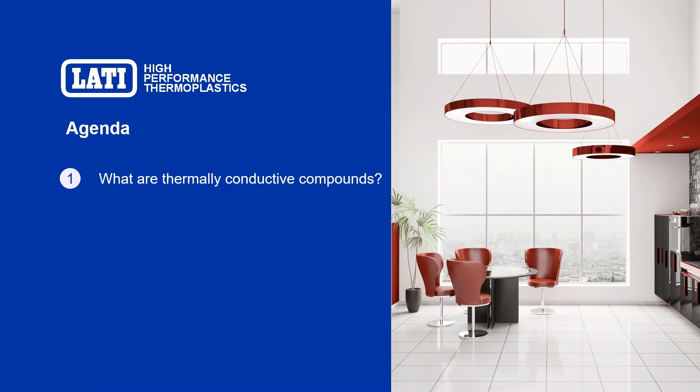We will discuss about 5 main topics. The first topic will be a short resume of what are thermally conductive compounds, how they are composed, and how they do work. The second topic will be about the properties of thermally conductive compound and how they can actually provide staggering improvements to your projects as long as they are properly used in your applications. So we will talk a little bit about proper design with thermally conductive compounds.

But the topic of the day will be about the environmental sustainability of plastic-based thermally conductive materials. We will try to better understand what is environmental sustainability and how plastic can actually compete with traditional solutions as metals in developing more sustainable applications. We will talk about the so-called GWP, which is the global warming potential, which is a well-known term describing the way products and processes impact on greenhouse gases generation.

And we will try to better understand how thermally conductive compounds from LATI, the so-called LATICONTHER compounds, can actually provide very interesting figures when it comes to the GWP. At the end of the webinar, we will try to wrap up and draw some conclusions about how these plastics can actually provide a very interesting proposal for not only perfectly working, but even perfectly sustainable applications.

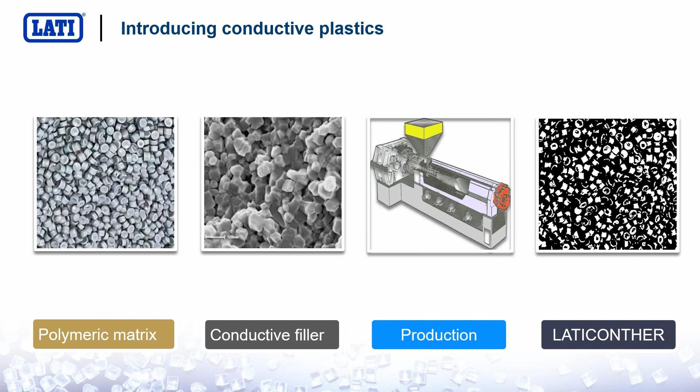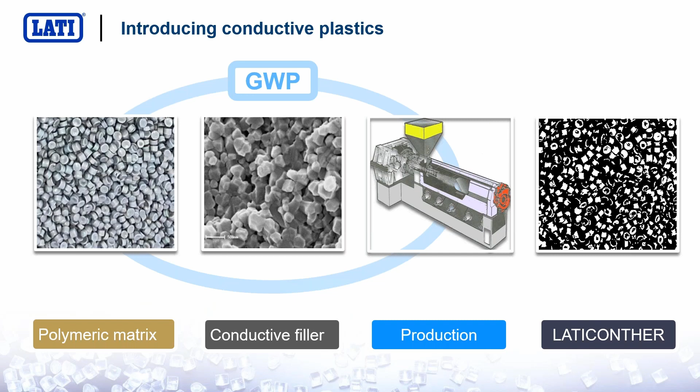Now, the first 3 steps, so the generation of the polymeric matrix, the production of the conductive filler, and the extrusion of the pellet in itself, contribute to the production of greenhouse equivalent gases. So we will try to understand how these 3 phases actually contribute and how they do actually weigh when it comes to GWP.

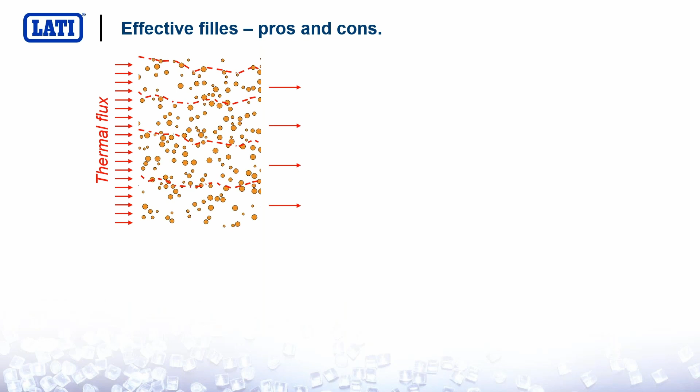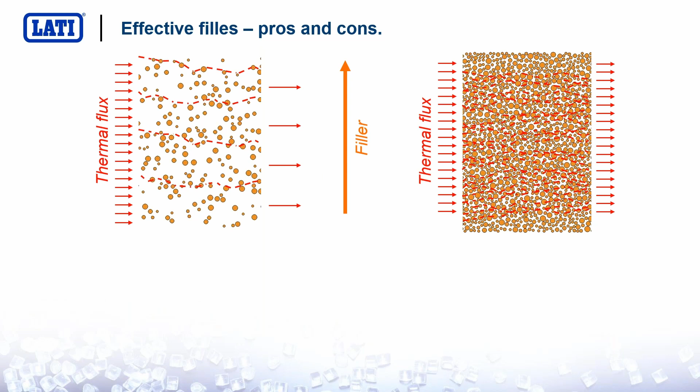The more you increase the filler content, the more capable your material will be to properly transmit and manage the heat flux. So, as you have already understood, thermally conductive compounds feature staggering high filler content. Today we produce up to 80% of graphite and ceramic to have reliable thermal performance. And of course, you have to be able to select a proper polymeric matrix, because not all polymers can actually be used to produce effective and properly working thermally conductive plastics. Only some of them, like polypropylene, some polyamides, polyamide 12, PPS, and so on. But not every polymer can be used.

Well, let's suppose we have been able to produce this highly filled compound. Which are the disadvantages of this kind of product? Well, these products are rather viscous, so they cannot be used for all-around applications.

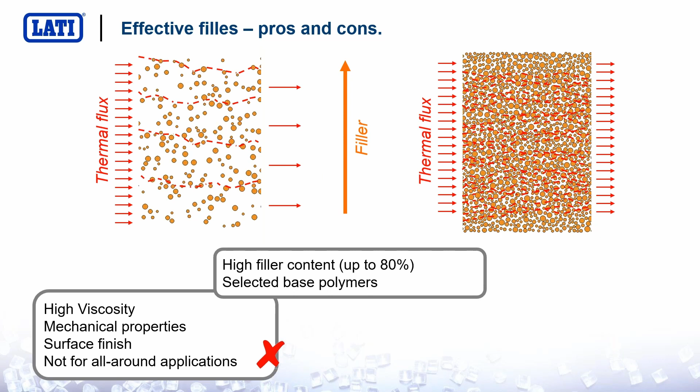The surface finish is not perfect, and the mechanical properties of these compounds are not as good as proper structural plastics because of the high amount of inert filler we've been able to put inside.

But which are the advantages of these materials? First, you have a very high thermal conductivity, 100 times higher than ordinary plastics. Then you have very good dimensional stability—your injection molded part will stay flat and respect the tolerances on your drawing because of the higher filler amount. The performance of these materials will last in time: the thermal conductivity we've given to the plastic will not fade away, it will be constant in time. So you can actually design for parts working even in 20 years.

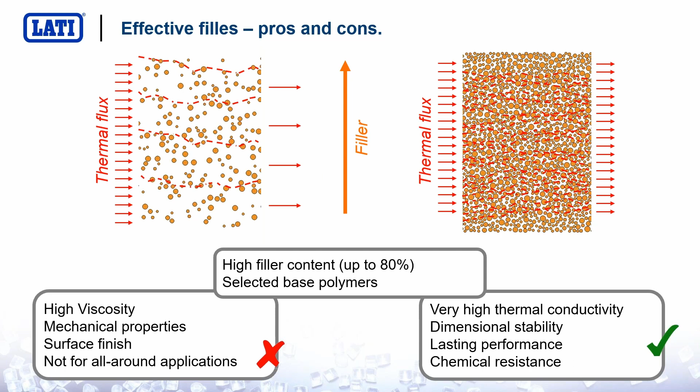Last but not least, don't forget the chemical resistance of plastic, which is actually much higher than that of metals, especially for outdoor applications or under the roof where you can have temperature and dirt build up. Chemical resistance is always a very interesting advantage of plastic.

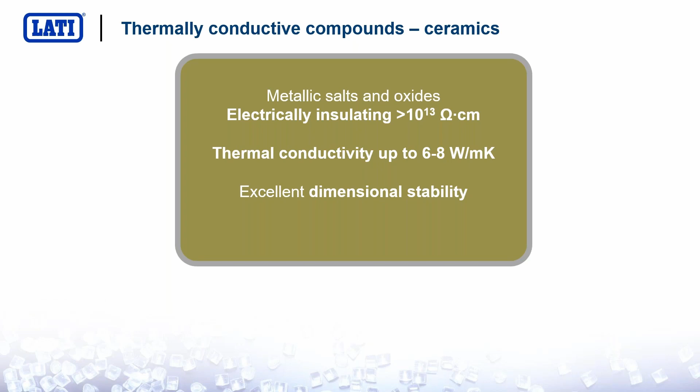Now, we've understood that we have to put a lot of filler into plastic to have a thermally conductive compound, but which kind of filler? You can select from ceramics, which are normally metallic salts or oxides. These ceramics are effective from a thermal conductivity point of view, they provide excellent dimensional stability, and they are electrically insulating, which is also very important for some E&E applications. You can also rely on some other interesting properties.

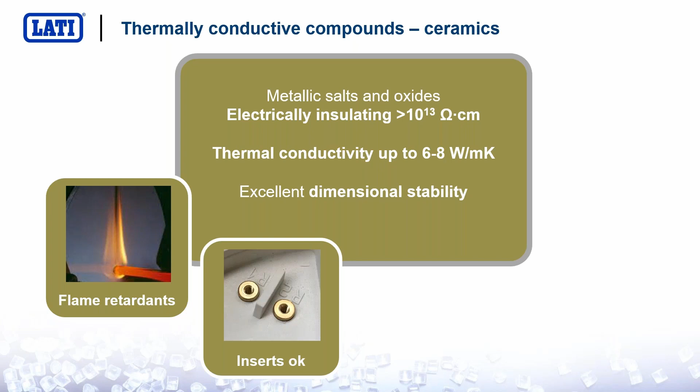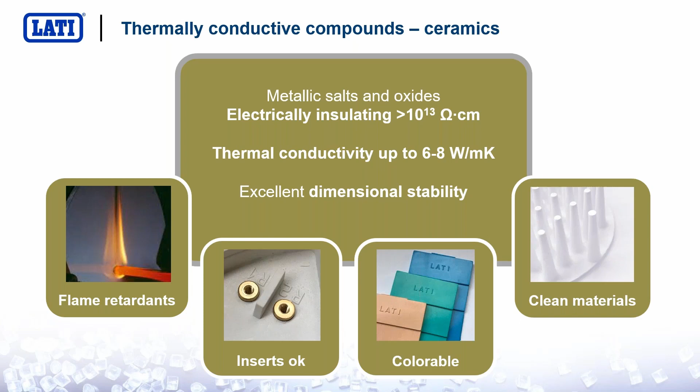Some of these thermally conductive ceramic-based compounds can be flame retardant. They can accept inserts, they can be somehow colored—even if you cannot have full chroma, you can have some faint, light colors. And they are clean materials; they will not stain your machine or your application.

The other chance we have is graphite. Graphite is an extremely versatile product. Actually, graphite can be electrically conductive, very electrically conductive—the resistivity of the material can be as low as 10 power 4. The thermal conductivity anyhow is really very, very high. This is the highest thermal conductivity that we are able to achieve, close to 30 watt per meter Kelvin.

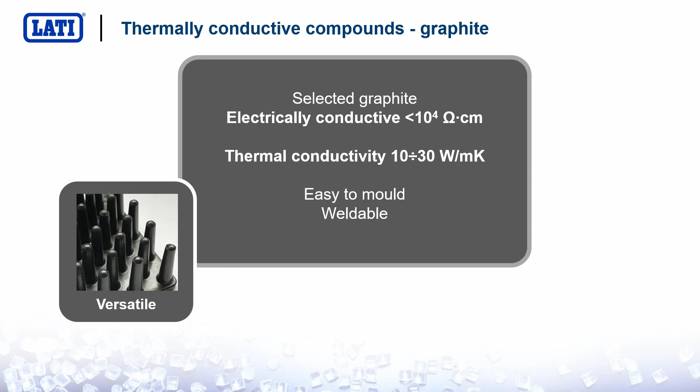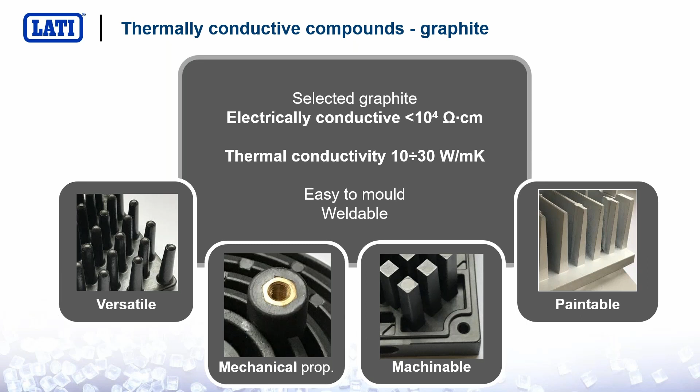They can accept inserts and can be machined, so from a mechanical point of view they're very interesting compounds. You can somehow drill holes, you can use screws directly into these graphite-based thermally conductive plastics, unlike ceramic-based ones, which are more brittle. And you can also paint them because they're electrically conductive—you can use modern powder painting techniques.

The biggest issue when it comes to thermally conductive plastics is to properly disperse the filler. You have to achieve an excellent dispersion of the filler inside, otherwise the compound will not work.

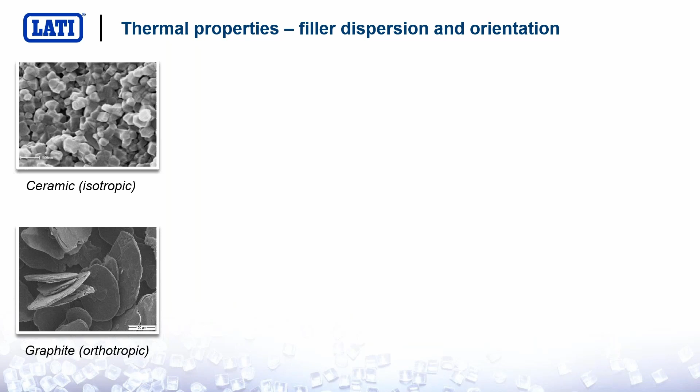The fillers are very different, not only chemically or morphologically, but also in shape. Ceramics are more or less always isotropic—they are like small spheres, as you can see above. Graphite and hexagonal boron nitride are flake-oriented particles, so they can actually orient during filling. Why am I saying that? Because the thermal behavior of these plastics, when using a flake-shaped filler, can change quite a lot depending on filler orientation and wall thickness.

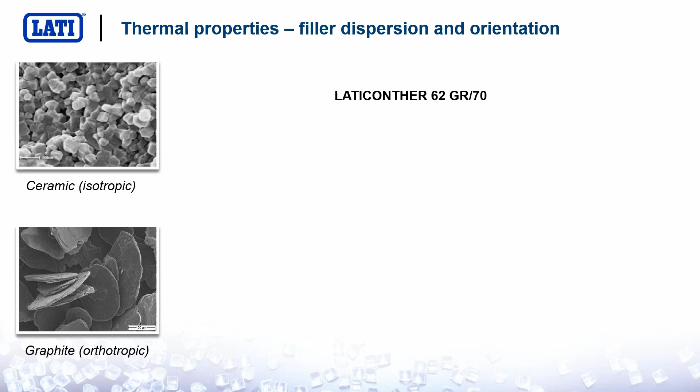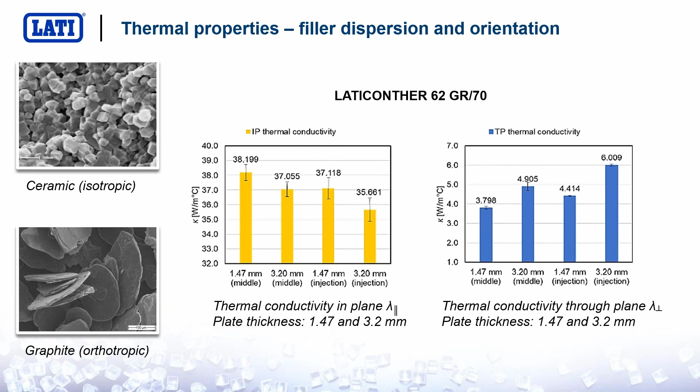Through-plane is completely different. The through-plane conductivity, which is normally what's used in many applications, is much lower—in the range of 3 to 5 watt per meter Kelvin, up to 6, and it will be higher the higher the wall thickness. But let's look at these numbers: we're talking about 40 watt per meter Kelvin, while plastics normally have a much lower figure. Now, let's make the first comparison between thermally conductive plastic and the king of heat management, which is aluminum.

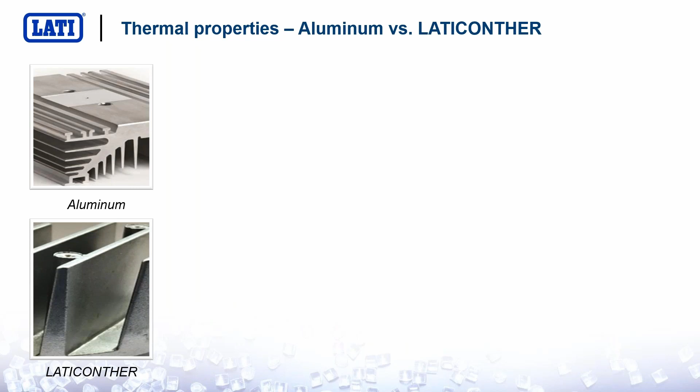Aluminum has a very interesting set of properties when it comes to electrical and thermal conductivity. Let's take a look at that. I'm talking about die cast aluminum, not elemental pure aluminum, because die cast is the most used aluminum in thermal management applications. Its density is 2.7, and its conductivity, along plane or through plane, is 110 more or less, which is lower than elemental aluminum. Elemental aluminum is as high as 200 watt/meter Kelvin, something like that. But actually we have to focus our attention on this number, more than 100 watt/meter Kelvin.

An ordinary reinforced plastic like nylon 66 with 30 or 35% glass fiber has a much lower density, but the thermal conductivity is close to 0.1, 0.2, something like that. A thermally conductive ceramic-based material has a density close to 2, so we're getting closer to aluminum, and the conductivity is more or less 10 times higher than ordinary plastics, but we're still very far from metal.

If we use a high-end ceramic like hexagonal boron nitride, we can rely on conductivity in the field of 4 to 6 watt/meter Kelvin, which is much better than ordinary ceramic, but we're still very far from metals. But let's take a look at what happens when we use graphite-based materials, for those applications where the electrical conductivity of the material is not a problem.

What is the performance of these materials? Well, on average, a typical graphite-based thermally conductive compound has a density between 1.5 and 1.6, so we're close to half the density of aluminum. And the thermal conductivity is, as we've seen before, from 5-6 watt/meter Kelvin through plane up to 30 watt/meter Kelvin in plane. You may say these numbers are still very low compared to aluminum, but we'll see that in many applications, the higher thermal conductivity of aluminum can be redundant.

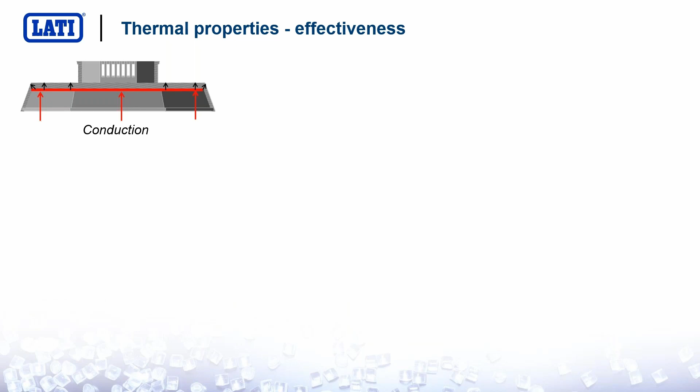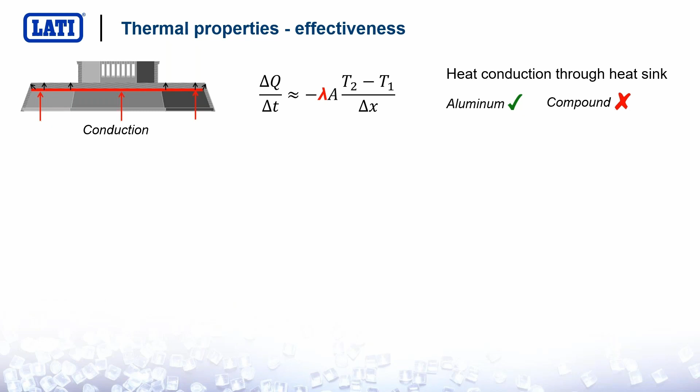So the aluminum heatsink will warm up in a much lower time than the plastic compound. The second step is moving heat from the heatsink to air, and in this case we're actually facing a determining step, because it's not easy to convince air or any other fluid to take away the heat. That's the reason we have different fluid regimes: we can have natural convection, letting the air or fluid move freely around the body of the heat sink and remove heat, or we have so-called forced convection, when we use a pump, a fan, or an impeller to blow air or any other fluid against the warm body to cool it down and remove heat.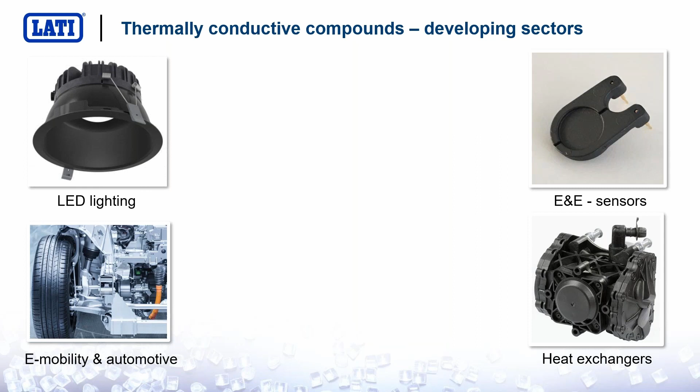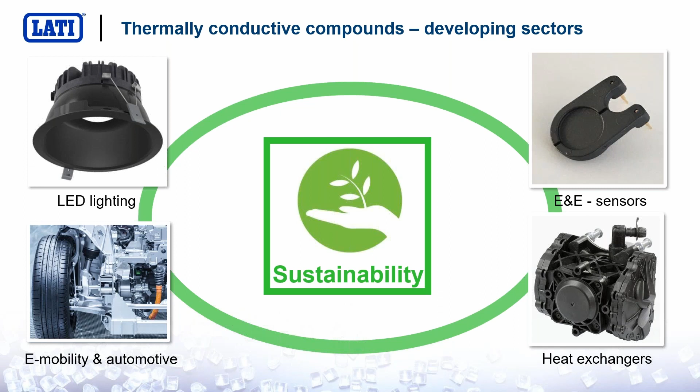They all must show a much better sustainability, not only of the processes, but also of the end product. As you for sure have already heard from many of your customers or many of the OEMs or end users, the whole Western market is moving in the direction of a much more sustainable development. So how can these plastics actually help you in developing more sustainable and reduce the impact on the environment of your projects? First of all, we have to understand what is sustainability.

When is a development actually considered as environmentally sustainable? Of course, when it satisfies the needs of the living generation, but it must not compromise the right to the same satisfaction of the forthcoming generation. So it must not deplete the planet assets and resources. It must be respectful of water, of energy, and raw materials, and of course, it must be respectful also of the climate and biodiversity. It is not so easy today to show that our processes are properly sustainable.

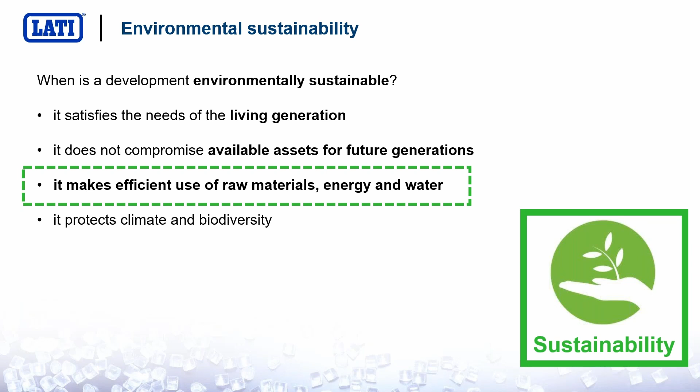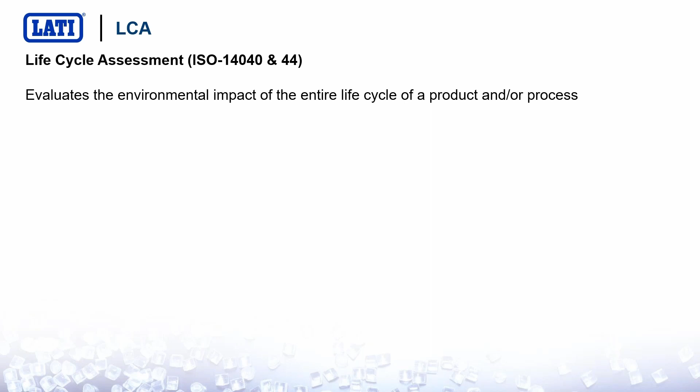But now we are going to focus on this concept of efficient use of energy and raw materials, because this is at hand. We can do something about this with the way we choose our materials and with the way we design. How is the sustainability of your product and your process evaluated? By the so-called life cycle assessment, which is a very complicated measurement criterion used to better understand how your process and your product will actually impact on the planet. So the whole life cycle of a product is taken into consideration, from the production to the part manufacturing, transport, use, and end of life.

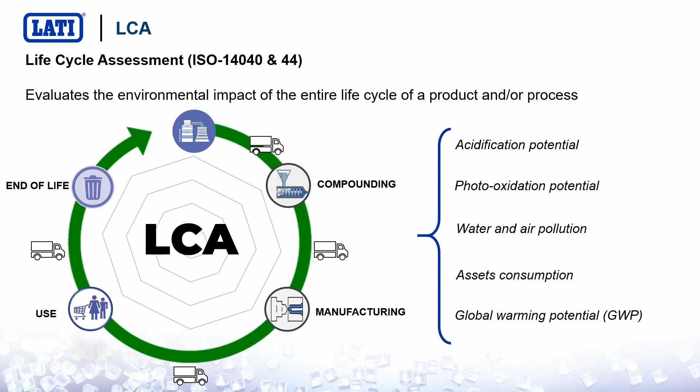And some parameters are very carefully evaluated, mostly related to the way the environment is involved in this process. And the last of these, the last in the order, but not by relevance, is what I told you before, the global warming potential. Let's focus our attention on this topic. What is the global warming potential? The global warming potential indicates how much a product or a process actually contributes in generating greenhouse effect gases.

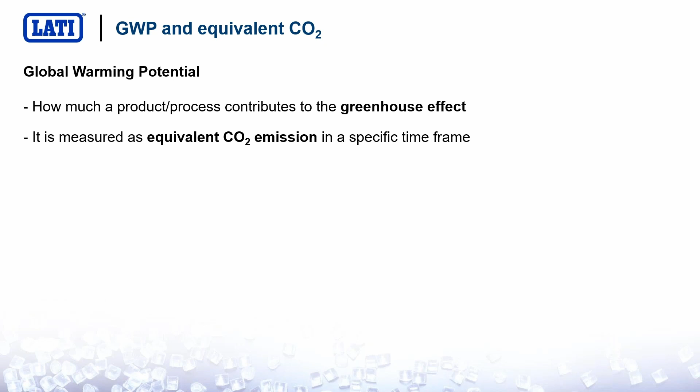It's very tricky, it's very complicated to evaluate how much not only CO2 but also CO2 equivalent are produced by the whole product line and the whole processes involved in the production of one single device. But it is possible today to measure how much equivalent CO2 is produced in a specific time frame by a product or a process. In the case of LATI, of course, we have to evaluate, as we say, from cradle to gate. So from the production of the raw materials to the moment the compound exits our production facility.

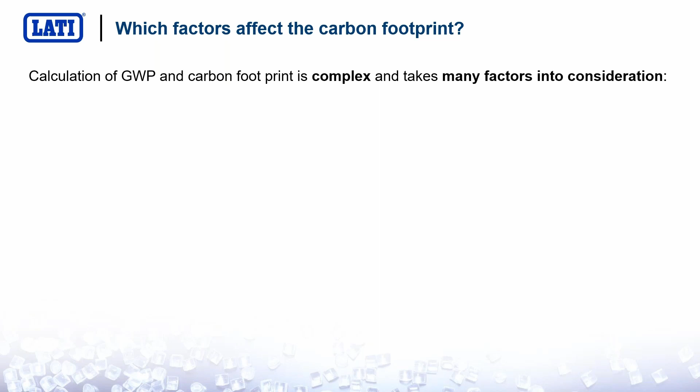The calculation of the global warming potential and related carbon footprint is really very complex and takes a staggering amount of time. You have to be extremely careful because many factors are taken into consideration. These decisions can be also influenced by who is actually making the math, but I want you to better understand how this works. The global warming potential is affected by the type of asset that you're actually extracting and the quality of the asset that you are extracting. How pure is your material? How many processes will it require to be properly processed and refined?

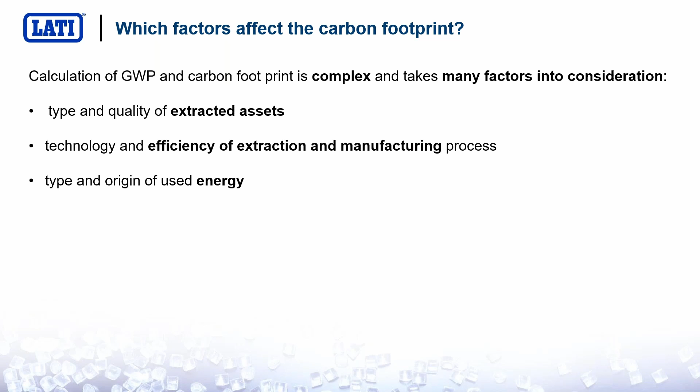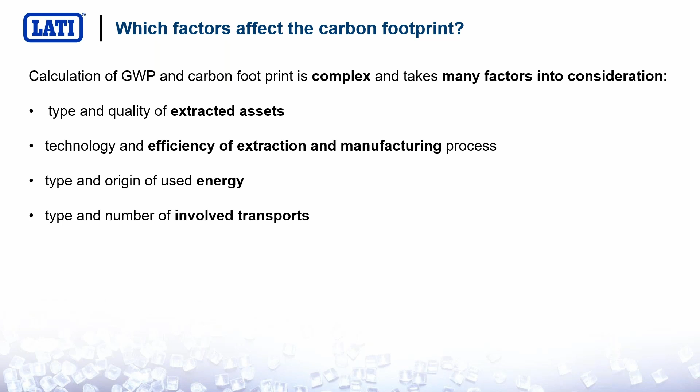By the technology and the efficiency that you're actually using in your manufacturing process, by the type of energy that you're actually using. Where does it come from? From renewable sources? Is it fossil fuel based, whatever? And by the type and number of transports. Of course, the more you have to displace your raw materials, the higher will be the impact of your product and your process on the global warming potential. Let's give a look at some numbers.

Let's focus our attention on primary aluminum. Primary aluminum means the aluminum that you extract from the mine to the first usage. The global warming potential that you can find in literature spans from 5.3 to 41. So you can see how wide the range is where the GWP of aluminum, expressed as kilogram of CO2 equivalent per kilogram of aluminum, can be. For this presentation, I have assumed a number of 8.5. So I wanted to be fair and stay as close as possible to the lowest number of the range.

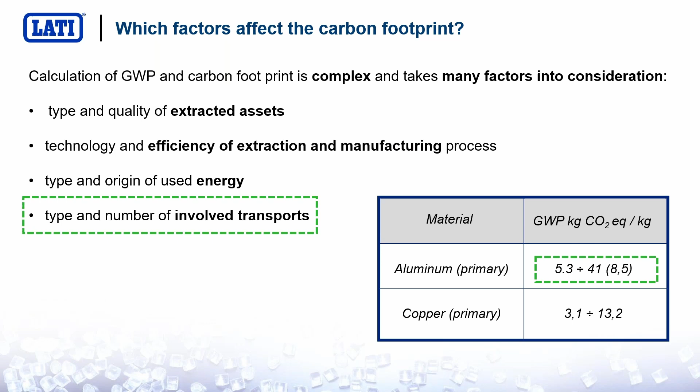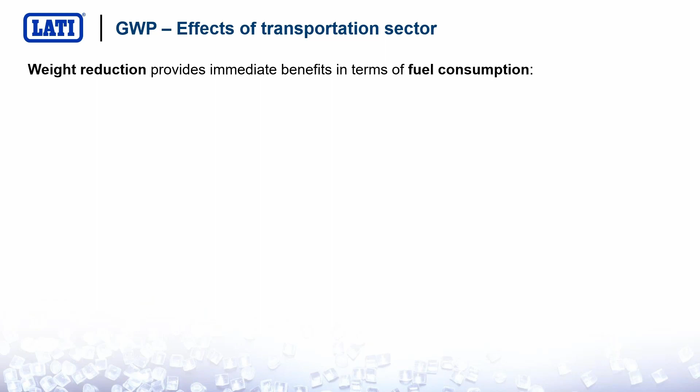So this is the number that I'm going to consider, but now I want you to focus your attention on the topic of transports, because that's exactly where our plastics kick in, and that's exactly where we are selling and proposing them right now. Why are we talking about transports? Because any weight reduction will provide immediate benefits in terms of fuel consumption. The lighter your car, your truck, your whatever, the lower will be its fuel consumption. And this is absolutely fundamental if we consider that more than 25% of greenhouse gases are produced by transports, and 80% of that 25% is produced by wheel transport.

If we are able to replace steel with a lighter material such as aluminum, we can actually reduce the weight by 45%. Let's imagine if we replace steel with plastics, which actually weigh half of aluminum. And if we were able to save 10% of weight, we would save 8% of fuel. And this means that we will have a much lower impact on the environment in terms of CO2 emissions.

So the more we move in the direction of hybrid and electric, the higher is the requirement for lightweight parts. And that's exactly where plastics kick in, and that's exactly where plastic can make the difference. E-mobility and hybrid mobility.

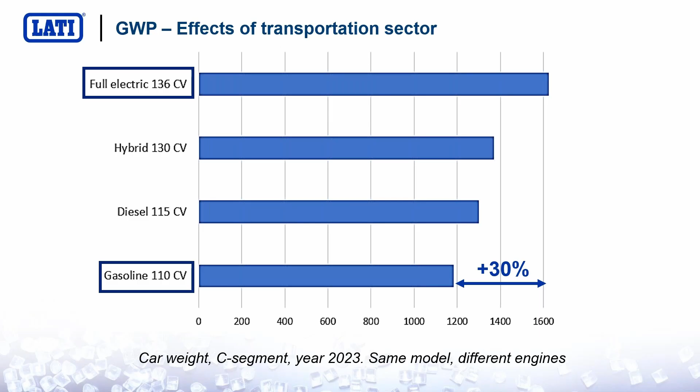Let's make an exercise. Let's suppose we are able to replace steel using nylon 66 and 40% carbon fiber, typical injection moldable or composite, whatever. The weight reduction is 70%, but of course it is mandatory to re-engineer the geometry of the part because you need the same structural performance. So you need to change the geometry of the plastic part. You will have to increase thicknesses, put ribs or whatever.

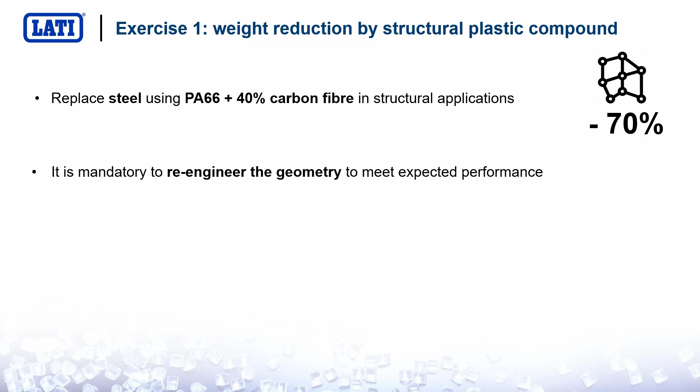So you have to take into consideration what is called the material index, describing how much mechanical performance is actually delivered with that very material. And the numbers say that you can have a much more favorable material index when it comes to carbon fiber reinforced plastic versus traditional materials like aluminum. So you will have more strength with lower weight using carbon fiber reinforced plastics.

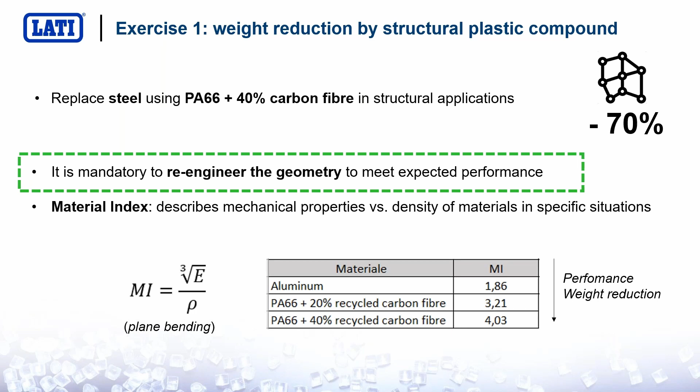But how does it work? It is mandatory to re-engineer your part. Focus your attention on this topic because it is very important. For structural plastics, you need to re-engineer your part, and this can mean changing the geometry. It is a big effort. It is not easy. It is not straightforward. You cannot use one-to-one plastic to metal replacement in the same geometry. You will have complete failure. You need to redesign your part.

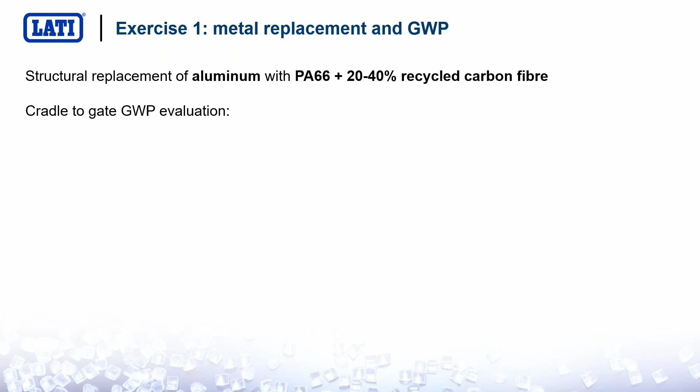Now, let's translate this exercise from structural metal to structural plastic, and let's evaluate the global warming potential reduction. Let's evaluate the cradle-to-gate global warming potential of aluminum and plastic. In the chart you see here, you can see actual numbers which can be found in the literature. For aluminum, I wanted to include 60% of scrap aluminum in a die cast. So the global warming potential for die cast aluminum featuring 60% recycled is more or less 4 kilos of CO2 equivalent per kilo. Remember this number, 4 kg of CO2 equivalent per kilo of aluminum using 60% recycled. I know that today some die casts can be 100%, but let's focus our attention on this 60%.

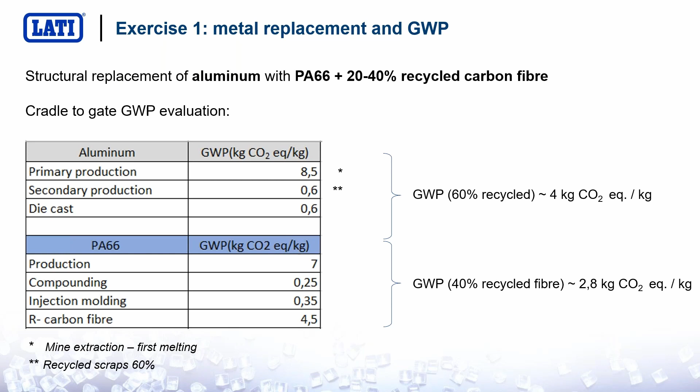What happens with nylon 66 featuring 40% recycled carbon fiber? The global warming potential is 2.8 of CO2 equivalent per kilo. Per kilo. It means that we will also have to take into consideration the density of the materials to have the proper global warming potential of the very application. Okay, we have understood how it works.

So now exercise 2. Let's evaluate the global warming potential of thermally conductive plastics, because that's exactly what we are here to talk about. We have focused on two of the best-selling LATICONTHER compounds, nylon 6 with 50% graphite and polypropylene with 70% graphite. For the nylon 6, you can see that the formula includes nylon 6 and 50% of natural or synthetic graphite, whose global warming potential is kind of different, but it's more or less from 3.5 to 4. The global warming potential is 6.5 to 7 of CO2 equivalent per kilo.

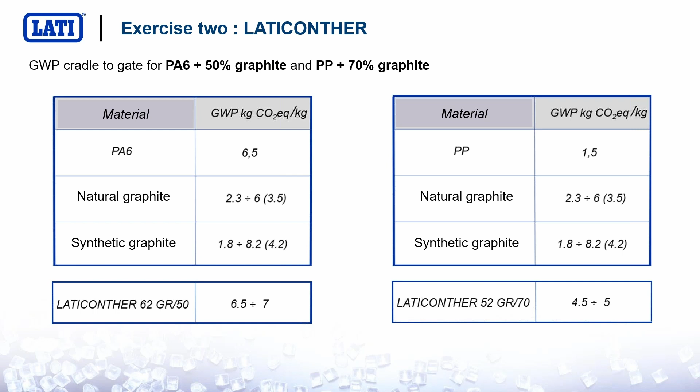If we move to polypropylene, this number can be vastly reduced because polypropylene has a very low CO2 equivalent when it is manufactured. So the global warming potential of a 70% graphite-based polypropylene thermally conductive compound is 4.5 to 5. If you want, you can also add an extra 0.3 to 0.4 kilogram of CO2 equivalent per kilo for the injection molding process, which will be not only from cradle to gate, but also the next step, which is actually manufacturing.

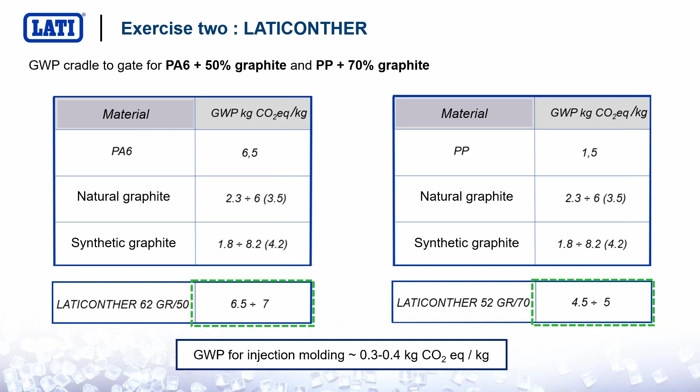Now, if we look at this number and remember the 4 of the die cast, we may ask, okay, so what's the point? The point is that you have to consider the density of these materials. So for a proper part, for an application, as the LED light housing you see here, you have to evaluate the global warming potential of a functional unit. So you have to evaluate the global warming potential per volume, not per kg. So that's exactly where density difference kicks in.

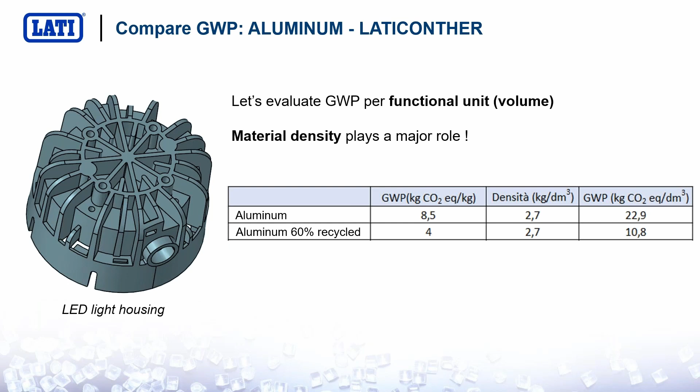If we make the math, we can see that for aluminum, the global warming potential for the very part, same geometry, same volume, even if we include the 60% recycled aluminum, is 10.8, and plastic is below that number. Please note that I am talking about virgin plastics. I'm not talking about recycled plastic. I'm talking about virgin base resin and virgin graphite, on the contrary of aluminum, which is 60% recycled. Very interesting numbers, isn't it?

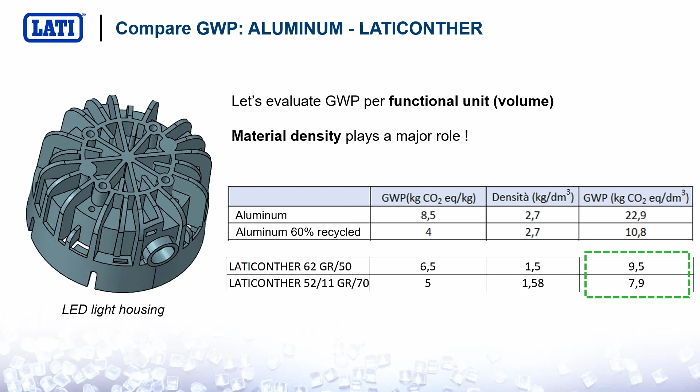Very, very interesting numbers. So if we imagine to move aluminum to LATICONTHER, to thermally conductive plastics, which would be the advantages in your very application? The thermal performance requires no material index. You remember that we have been talking about material index. What is material index? It is the amount of mechanical performance that you can use per kilo of material, of course, and that requires a redesigning of the part when it comes to structural application.

For thermal performance, you will not need to change the volume of your part to have a properly working thermal management application. The geometry can be the same. Actually, it can be lighter than metals, because you have to change something to use maybe graphite orientation. So you will not be required to add volume to have proper performance.

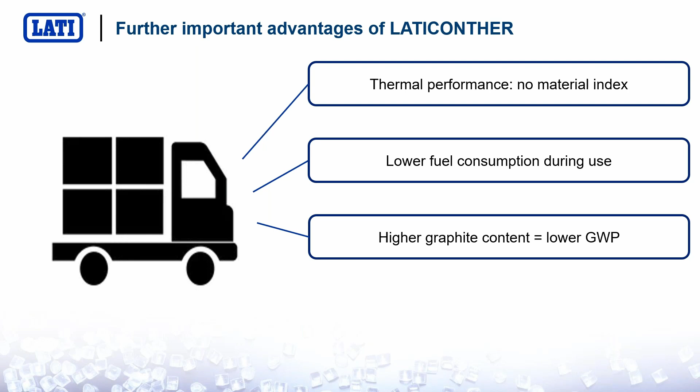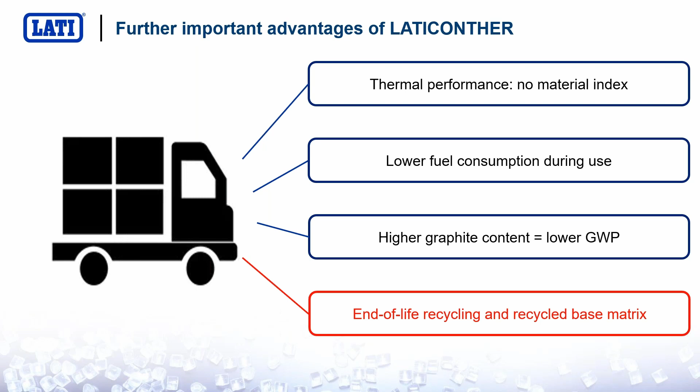Your car featuring plastic parts, of course, will consume a much lower amount of fuel, and this will have a very big impact on the global warming potential of the full process, which also includes many transports. The higher the graphite content, the lower will be the GWP when it comes to high GWP producing base resins like polyamide 6. And last but not least, we have been talking about virgin plastics. But what if we were able to use recycled plastics into our compounds? And this will be the booming topic of the next years: recycle, and recycle again.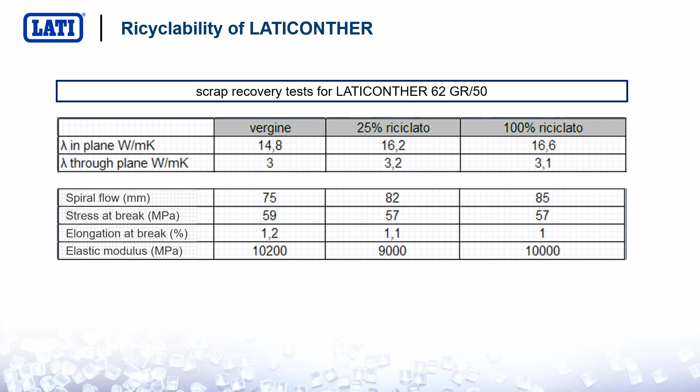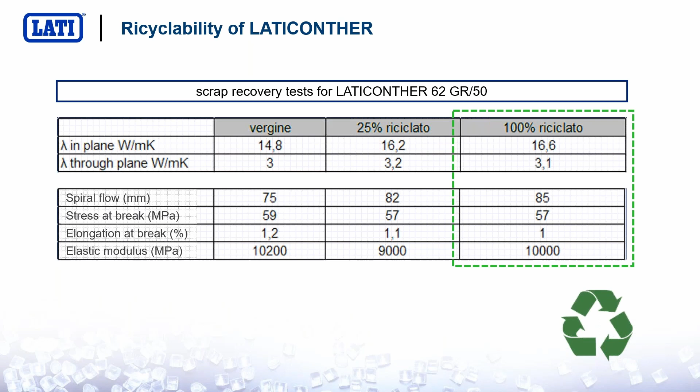This means that you can actually recycle thermally conductive plastics into virgin thermally conductive plastics with no diminishing, with no decaying of the thermal performance of your part. This means that these plastics are the best candidate for recycling. That's the reason why we are moving forward in this evaluation, and we have also made some calculation about this. Now, let's sum up. Let's face the difference between aluminum and graphite.

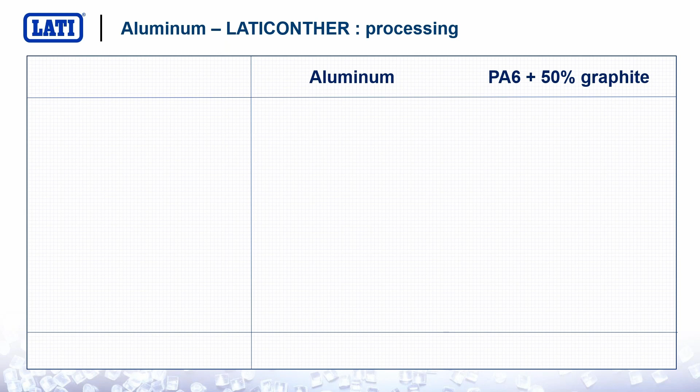Let's talk about the processing. When it comes to processing, you also pay the electric bill, let me say, and you also have to pay the maintenance of your equipment. When it comes to processing, the difference is really outstanding. The melt temperature of aluminum versus graphite is 700 degrees versus 250. The mold temperature is very different as well. The mold life expectancy is extremely different.

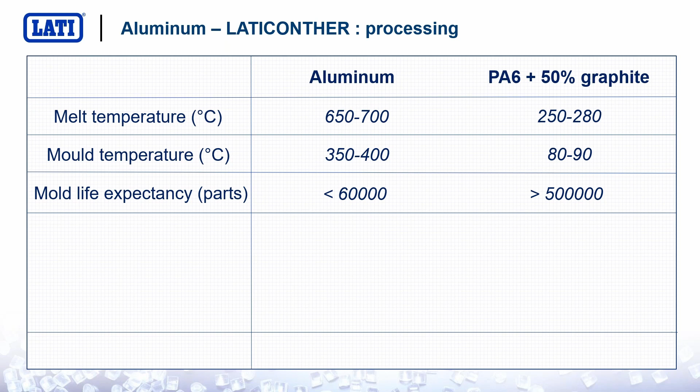If you are very good at die casting, you can rely on maybe 30 to 60,000 shots. With plastics, you can rely on more than 500,000 shots, but I am aware of molds lasting 1 million, 2 million shots. The minimum wall thickness that you can fill with aluminum is more or less 1.5, but with these thermally conductive plastics based on graphite, you can go well below 1 millimeter. The post-molding processes can be very expensive for aluminum, and they are not necessary for graphite. You pull out from the mold the finished part. There is no more sandblasting, despruing, no more painting, no more washing, there is nothing.

You pull out from the injection molding tool, you pull out the finished part. You can have some issues with aluminum, warpage, voids, depending on the way you cool your part down, on the contrary of nylon-based and graphite-based compounds, which can be mechanically brittle. This is the main disadvantage.

And last but not least, talking about scrap recovery, aluminum can be fully recycled, but you have to remove slags from the freshly new melt scraps, and this also impacts on the global warming potential. For compounds, you can recycle it 100%, but we normally suggest never to exceed 25 to 50%.

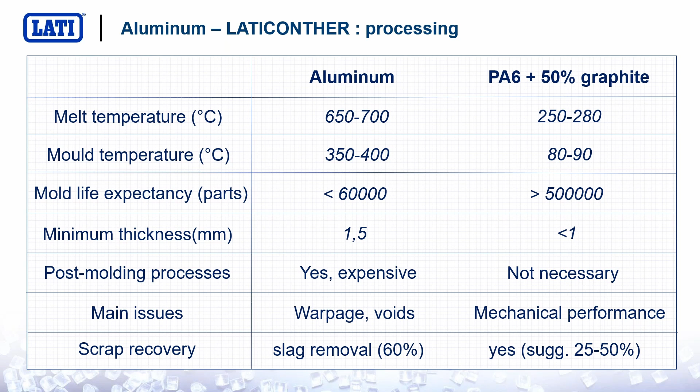So, advantages and disadvantages, I leave to your judgment in this chart here.

Let's talk about money, that's a very important topic. Let's talk about the raw material cost. These figures are up to date as of the beginning of, let me say, April 2023, so maybe they could be a little bit old right now.

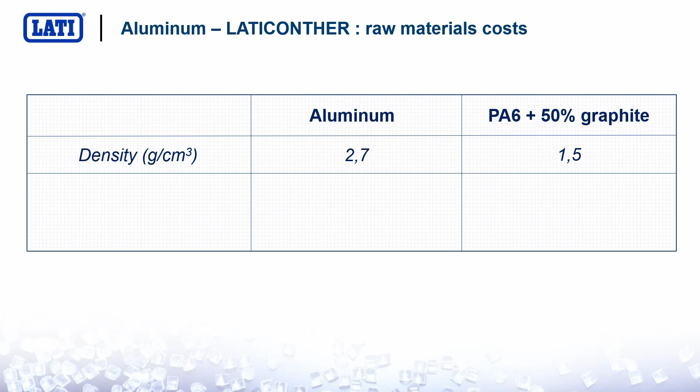When we talk about aluminum density 2.7 and polyamide 6, 50% graphite density 1.5, the cost per kilo of aluminum is from 2.5 to 4 euros. Polyamide 6, 50% graphite is from 6 to 7 euros, depending on the amount of product that you purchase. So if you do the math, you multiply by density, and you see that the cost of the raw material per cubic decimeter, that's actually the cost per volume, is competitive.

So not only from a performance point of view, but also from a GWP point of view and from a cost point of view, thermally conductive plastics can be a winning choice.

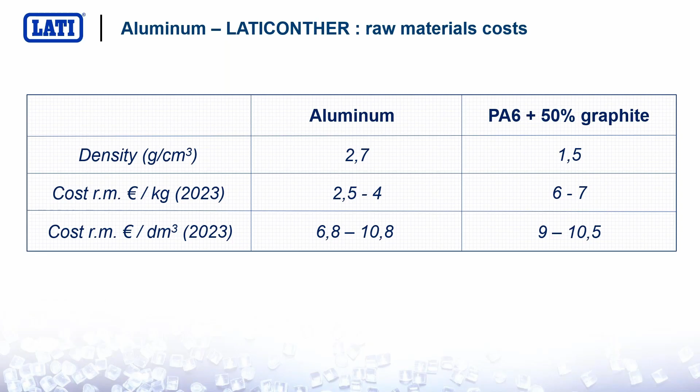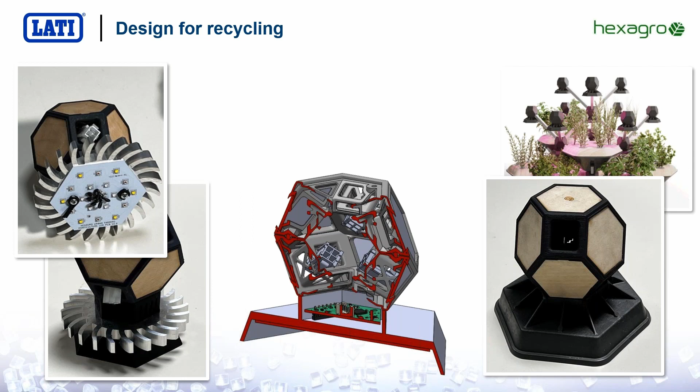And it would be even better if we were able to properly recycle them. Today, design for recycling is a major topic. Lati will be involved next week in a presentation in Munich at the AMI convention, talking about this design for recycling. This is the most challenging topic for the near future. Our end products must be conceived and designed for further recycling, not only the plastics, but also the end products. If we were able to properly design parts for end-of-life recycling, we could turn this plastic back into virgin plastic and further reduce the global warming potential.

In this slide here, you see as an example the first concept of this LED lamp using 3-4 different materials, and the finished product using only one material. This is what I mean by design for recycling.

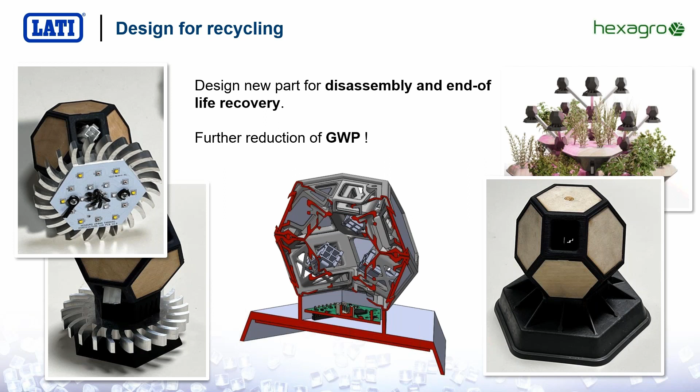So we are at the end of our webinar. I would be pleased to draw some conclusions with you.

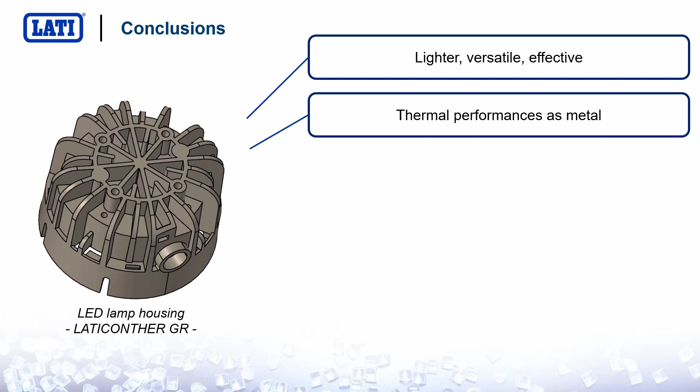Moving from metal to plastic will allow a much lighter, versatile, and effective solution in case of natural convection. The thermal performance will be as good as metal. Even if the numbers are lower, the thermal performance will be the same because of the rate determining step, which is convection. The global warming potential will be lower thanks to the nature of plastics and to the lower density and lightness of the solution.

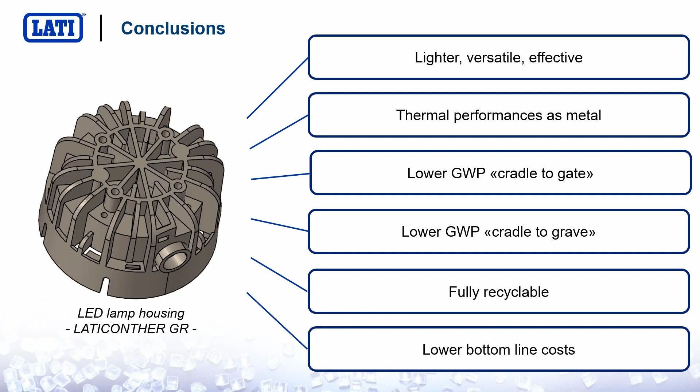Not only from cradle to gate, so from the extraction of raw materials to the production of the new compound, but also from cradle to grave, which means from the extraction to the end of life of the product. Plastics are fully recyclable, and last but not least, the bottom line cost can be extremely competitive.

So I really hope I was able to give you a decent introduction to thermally conductive compounds and how these compounds can support your application, not only in managing heat, but also in reducing the amount of global warming potential.